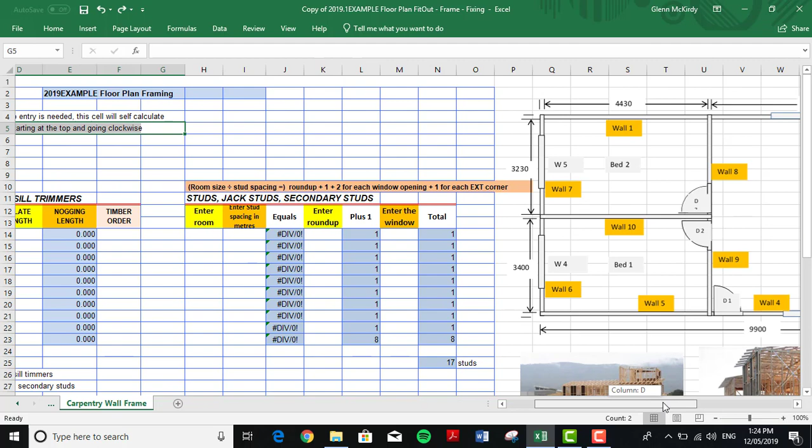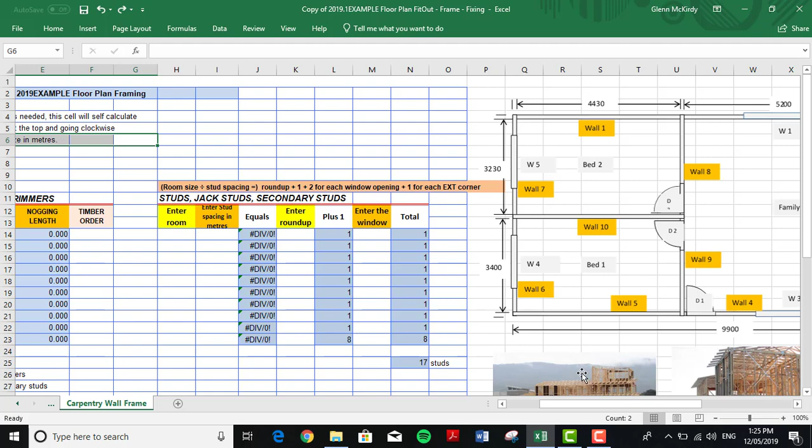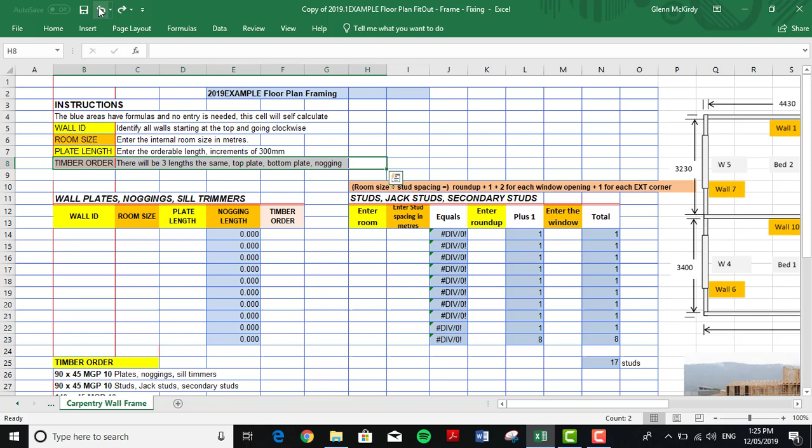So first of all, we're going to identify the walls in this column here. And they're the walls that we've identified there. We started at the top and went clockwise. Then we're going to put the room size in, and the room size is the internal room size. Wall 1 is 4.43 by 3.23. It's the inside dimensions. Then we put the plate length in that we would order, and it has to be in increments of 300. Then we'll put the timber order in, and on our walls we will have a top plate, a bottom plate and a noggin, and they will all be the same length.

So first of all we put our wall IDs in from 1 to 10, because that's how many walls we have over here. Then we put our internal room sizes in. There we have them there. Then we put our plate length in. This is what we would order. So when we have a plate length, we've got to allow for the wall junction, and if we add 180 millimeters onto this, it'll give us 4610, so we'll order a 4.8. Now if we add 180 onto this, it'll give us 5.38, so we'll order a 5.4, and we do the same all the way down here.

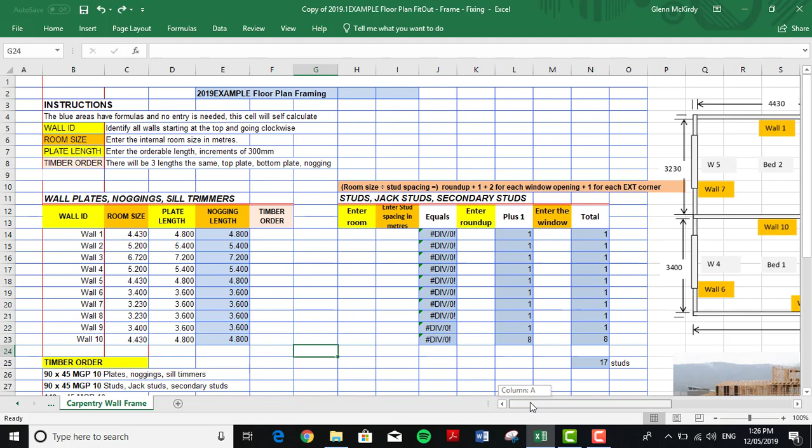The only exception to this is this 6.72 wall. We can't get that length in timber. So we'll write down 7.2 at the moment, and I'll show you how we address that in a minute. So when we actually put that timber order in, we'll have 3 at 4.8, 3 at 5.4, 6 at 3.6. That's the one that is 6.7 meters long. So what we're allowing for 7.2 is 2 at 3.6. So we'll have 2 3.6s for the top plate, 2 3.6s for the bottom plate, 2 3.6s for the noggins and sill trimmers. So the rest are just 3s. So they're all 3 at 4.8.

Then we do exactly the same over here. We put in our room size, these figures here, enter them in. Then we enter our stud spacing. They could be 450 or 600 centers, but our centers for this wall frame is 600, and it automatically calculates how many studs you have here. The formula is room size divided by stud spacing, then you round up, +1, +2 for each window opening, and then +1 for each external corner. So we have to round up here, so we enter 8, 9, 12, 9, 8, 6, etc. There we have it, and then this automatically calculates here. It goes +1, so that's the +1 part of the formula.

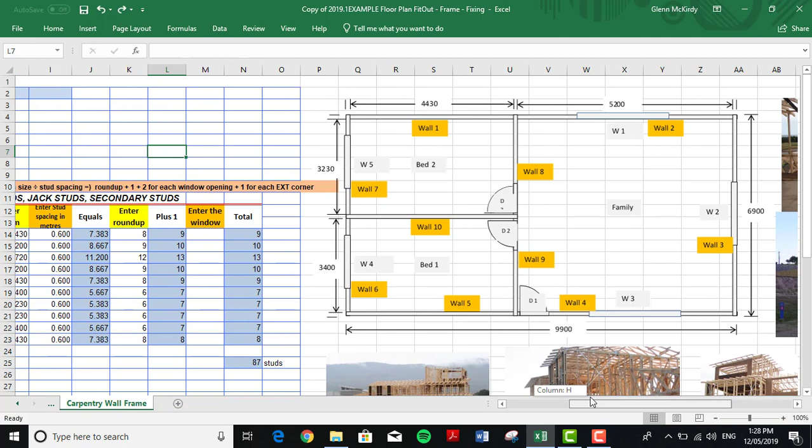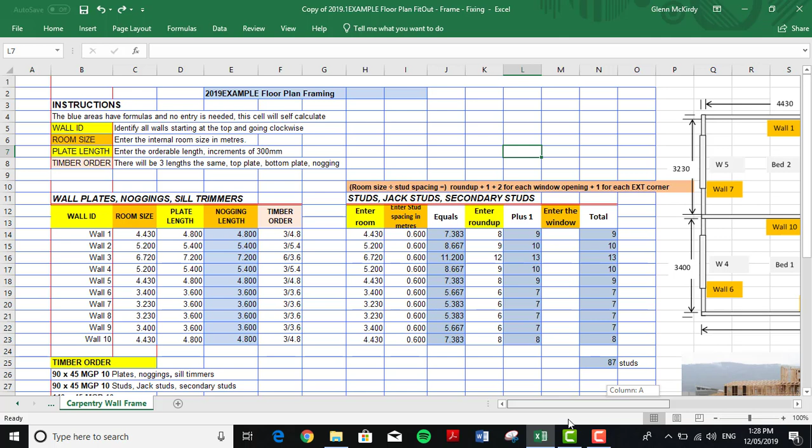Then we enter the windows. So in wall 1, there's no window. In wall 2, there is a window, and in wall 3, there's a window. So we go through there and we enter the number of studs that we'd need. They're secondary studs that support the window lintel. We have none in wall 1, but in wall 2 we needed 2 secondary studs. We needed 2 secondary studs in wall 3. And if you follow that plan, that's the number of secondary studs that we needed. So we're entering the number of secondary studs in each wall. That automatically tallies to that column there.

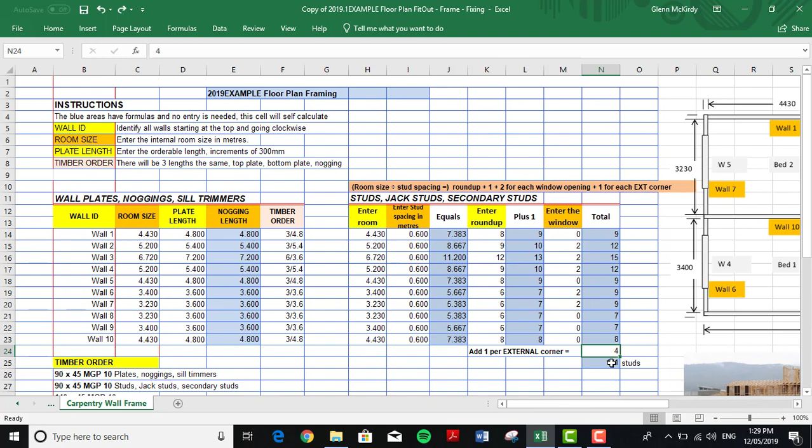Then we have to enter the corner studs. We have to add 1 for each external corner, and there are 4 external corners on the building. 1, 2, 3, 4. There we have our 4 there. So we now have 101 studs. Now that's just been using formulas. Now we're going to tally these together.

First of all, the 90 by 45 MGP10 plates, noggins and sill trimmers, and these are our lengths that we need. When we gather those together, we have 6 at 5.4, 9 at 4.8, 18 at 3.6. And for our studs, jack studs and secondary studs, we have 101 at 2.4. Then we have lintels. We have 3 at 1.8, and we can go through that in class. And our other lintels, we have 2 at 2.7. Then we add the number of meters. We've got 140.4 meters of plates, noggins and sill trimmers. We've got 242.4 meters of studs. We've got 5.4 meters of 140 by 45 lintels and 5.4 meters of 190 by 45 lintels.

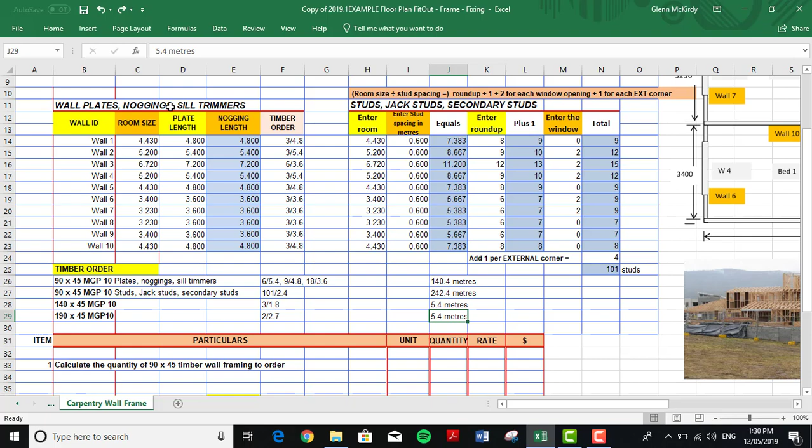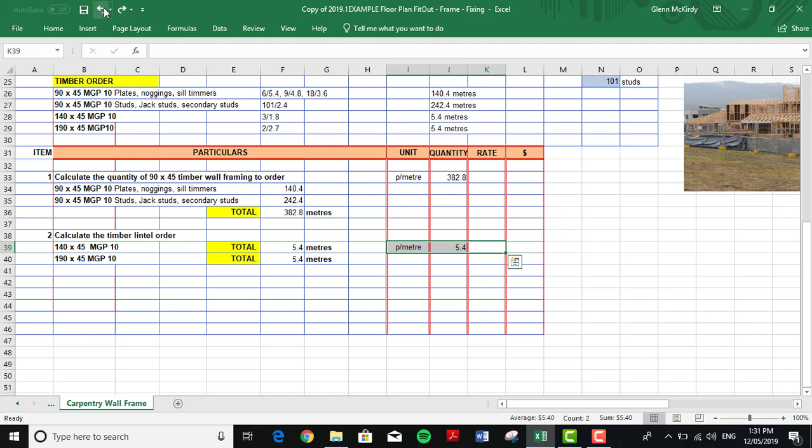Then we transfer these figures down to our costing sheet. Our 90 by 45, we've got 140.4 meters, put it down here. Studs and secondary studs, we've got 242, transfer it down to here. But we need to know the total number. We've got 382.8 meters of 90 by 45 MGP10. And here we have our lintels. We've got 5.4 coming down to here. Then we've got 190 by 45, 5.4 meters. Then we take these figures and put them in our costing sheet. The unit is per meter, and we have 382.8 meters. And there's our lintels, and that's our sheet.

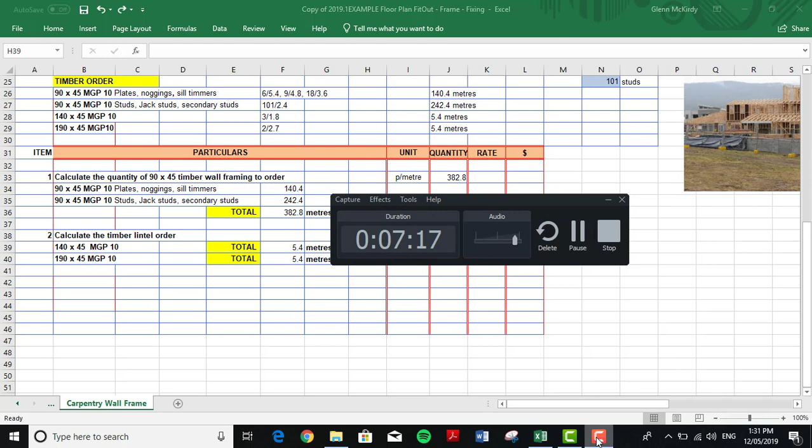So use this and good luck. The formulas do help you a bit. If you have any questions, just ask. Okay.